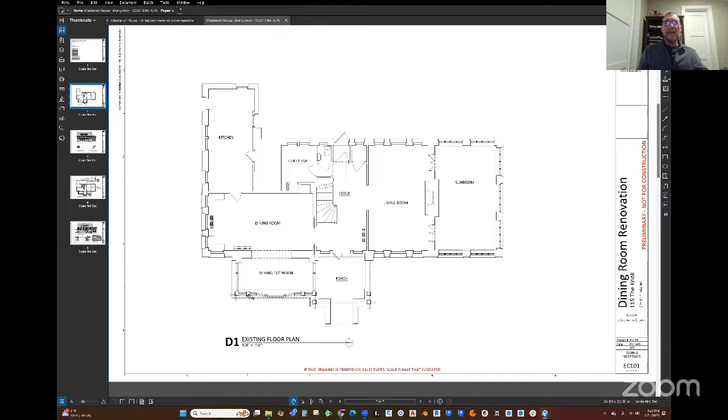I do, let me see if I can find one, because it really helps to... oh gosh, they're in the narrative. Yeah, I've got the ones that are relevant. Make it easier. Yeah, here we go, start with that first.

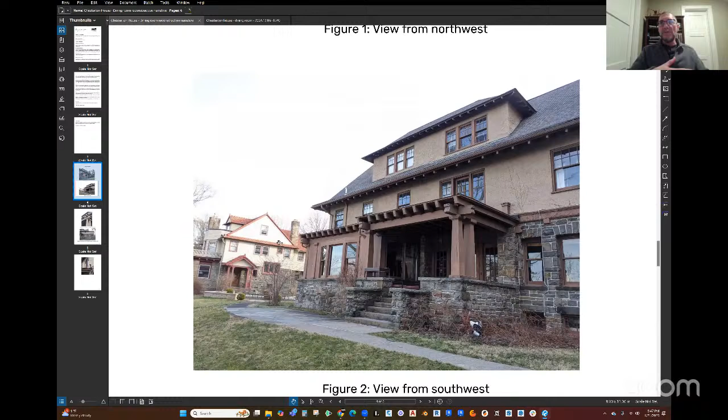Noah, maybe you can go back to a view of the previous page. So everything from the stone up would have to be removed, and then we wanted to reconstruct the porch in its entirety, but be more sensitive about the enclosure portion, where the dining room basically extends out onto that porch.

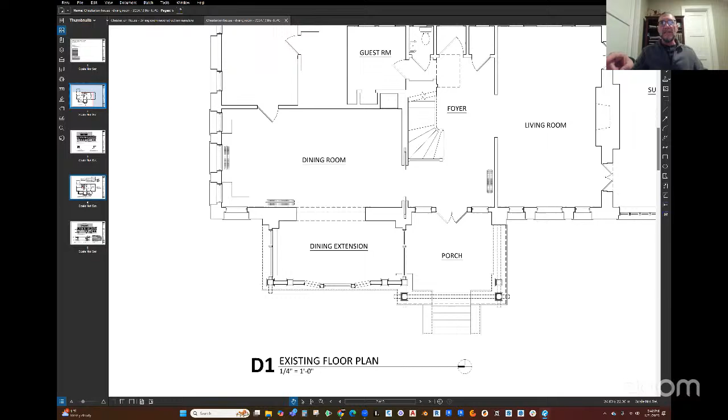So now, Noah, why don't you switch back to the plans, because I'd like to show the elevation there. So what we're proposing is... maybe you want to zoom in on that a little bit.

We're proposing to rebuild all of the wooden portions, the historic portions, but then behind it, put in some Marvin Modern Series glass, which has very minimal frames, just wide open glass, no screens or anything like that, so we can maximize the feeling of this being an actual open air porch.

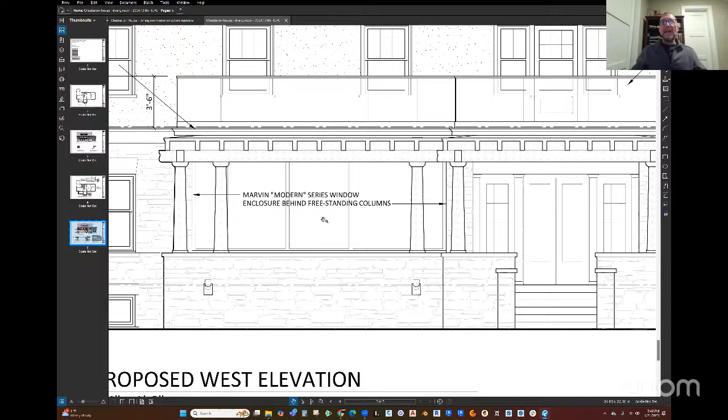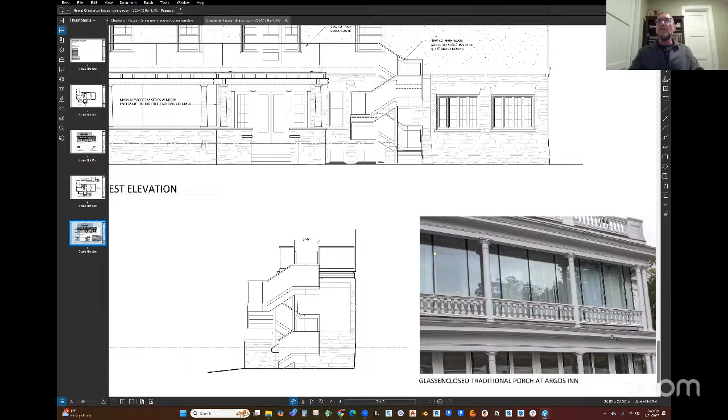And the client was also interested in developing a roof terrace up above. Originally this porch... you can see the kind of idea we're looking at here, which was done at the Argos, where the historic porch was there, and then to enclose it, the glass was set behind all of the historic elements, so it's very clear what's historic and what's not.

And what we're adding is extremely minimal, so as not to intrude on the original historic fabric the way that the insensitive enclosure did in the past.

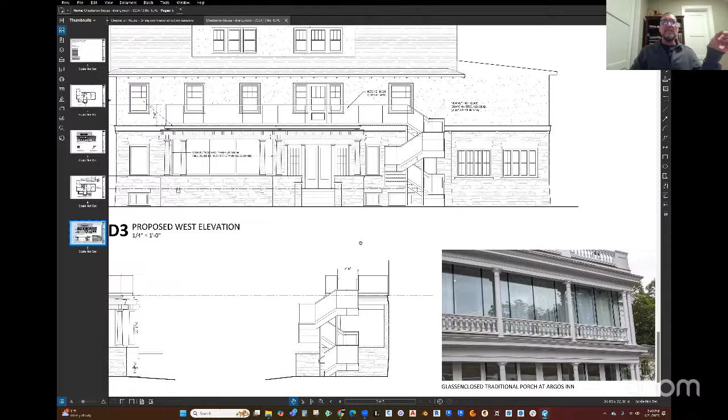Now, the client was very interested in developing a roof terrace on top of this, and there is actually a door there from the second floor stair hall. So originally, there was access out onto this porch. Unfortunately, the original railing was about 22 inches high, which does not meet code. We have to be 42 inches high for this building type.

So that meant that in order to do this, we would have to either build something 42 inches high in keeping with the original design, or replicate the lower railing and do something kind of clumsy on top of it, usually involving pipe railings or something set on top of the original wooden detailing.

We tried that and it just looked terrible, clunky. So then we got the idea to just continue using the glass up above, because we really have no obligation to reconstruct all of that original railing. So the thought was, make it all disappear, let the porch be the porch, but still allow a code compliant railing.

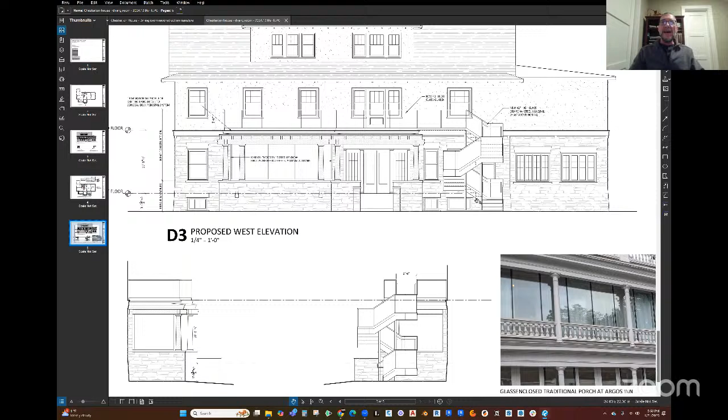That railing is all glass. The client also asked for a stairway to get down into the yard. This was a rather difficult piece to consider, because it's a large kind of sculptural element. What we're proposing is a steel structure, probably painted black or brown, with all glass railings, so that it appears more like a sculpture that is very separate from the design of the house, so you can clearly see what's modern and what's original.

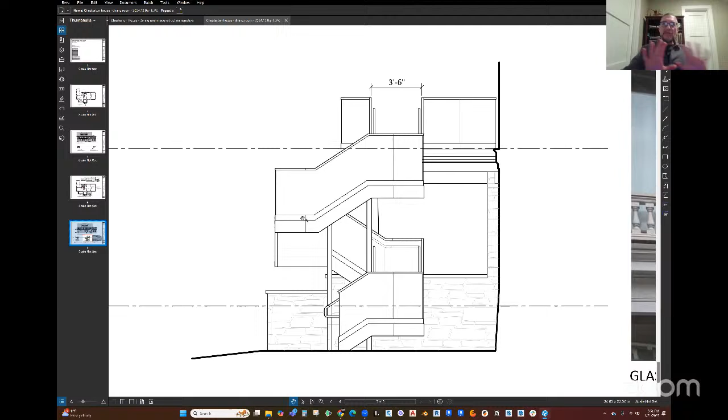So that's kind of the design in a nutshell. I'll let Noah talk about the other considerations that have come up today.

I just want to point out, the only evidence of that existing or pre-existing railing is this little pilaster that's against the house. Rob said that's about 22 inches tall, so it's not even close to being code compliant. One thought would be to leave that piece because it's there, but tie the glass railing into that point, and not even attempt to recreate that former balustrade, since we also don't know what it looked like.

I was thinking of taking cues from the balustrade inside the house, which is really wonderful and would look great out here. But unless somebody can find a photo of this before that balustrade was removed, we just don't know what it looks like. So we'd be guessing either way.

Is there only one half newel, or two of them? I believe there's only one. I did not see one on the other side, at least from the ground. It's a hard vantage point to see because the grade drops off. And at the time we were doing the field survey, the floors upstairs had just been polyurethaned, so we couldn't actually go up there.

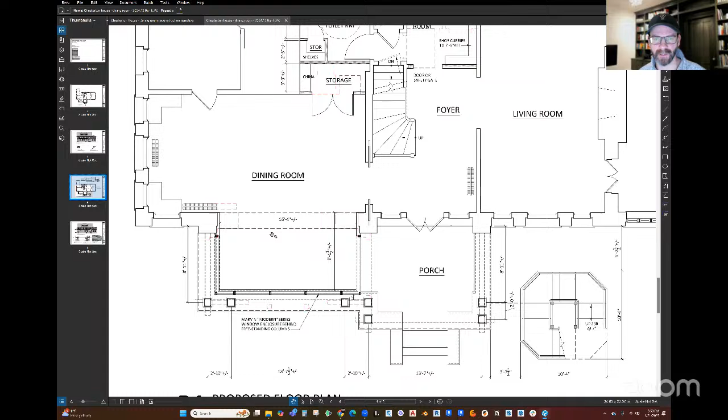We'd love to hear feedback on whether there's appetite to see something like that. But to be honest, those are likely things that wouldn't necessarily happen as part of this project, or at least maybe not initially. Maybe it gets phased in at a later date. There are also some interior improvements, including an accessible restroom, that we're not sure will make it into the scope. The real priority is to fix the porch, that's what we're primarily here for tonight.

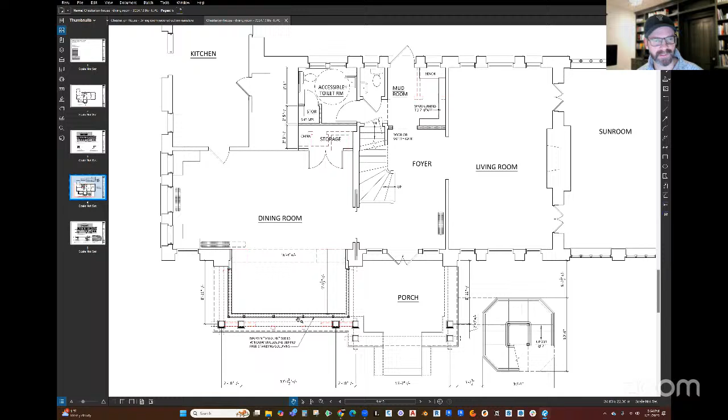With that, I think we'll leave it and open it up for any questions or comments.

What's the point of the exterior staircase, since there's not a public accessible route to that door upstairs? Does it go through a private room or something? No, there's access directly off of the foyer. The staircase goes up and there's a central hallway with direct access to that terrace. The thought would be just for convenience to create an outdoor connection.

So it's not a requirement, correct me if I'm wrong Rob, but it's not a code requirement because the terrace is essentially just an accessory use to the residential use, and it's not for very large residents. They're not going to have big parties up there, but they wanted to be able to sit out there and read and be able to go down into the yard without having to come back into the house, down the stairs, and out the back door. So it's very much an optional thing.

Are these new columns going to duplicate what's there? You're going to take everything down to the stone and rebuild. What will the new columns look like? Are they going to duplicate the historic? Yeah, the columns, the beams, the rafter tails, the extensions, every part of that would be recreated, would be documented and recreated exactly.

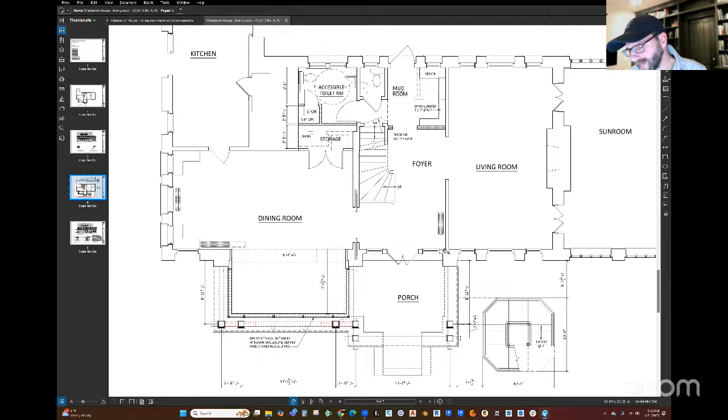It's important to note this is very similar to the Argos treatment, where the new glass wall we're introducing is set in about 7 inches from the existing to create that separation. We're really recreating the columns, but not touching the new to the old. It's intentionally separated.

Will the columns and other parts be solid timber or built up as box sections? I think they would be laminated in the same way. I'm not exactly sure what species and how that would be done, but it would make sense to recreate them similar to how they were. The only difference is we'd do a much better job with flashing caps on top to protect the wood. I don't think they failed early in their life, I think they failed over time, just with a lack of attention to detail.

I'm not convinced that the laminated sections are original. I think that might be some later repairs done by building up. I think the originals are solid timber. That was my sense, certainly possible. And I couldn't see any miter joints on the tapered columns, or at the corners or laps.

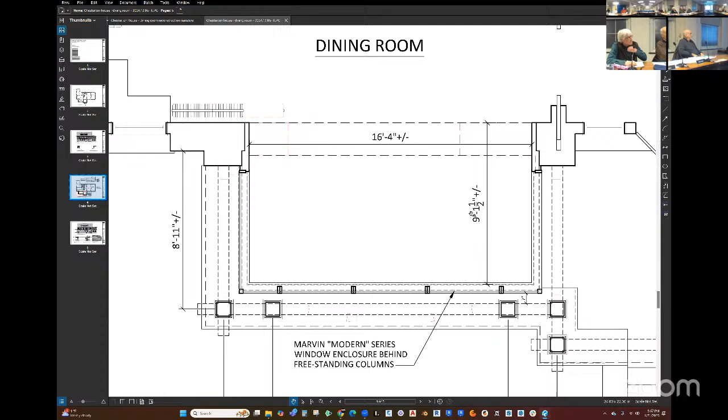Now, what's the story with the open porch again? Was it part of the original structure, or an addition built at some point? This particular porch, we believe, was part of the original structure. In fact, this was considered the main entrance because you got here by the trolley. I think these were all owned by the Treemans, so the trolley ran behind the house down the hill. So you really came in this entrance, because it's more symmetrical and clearly much nicer than the one on the other side.

We would certainly do some investigation on these beams to see if any are timber. It wasn't exactly evident to us, so it's quite possible it was a repair at some point. But I wouldn't be surprised if the method of laminating wood started around this era. I'm not convinced necessarily that it wasn't originally laminated. Perhaps Brian has input on that, or we could do some more research.

Yeah, I have actually seen laminated brackets before on older buildings, from anywhere around 1890 on. When they needed to be really super thick, they would laminate several layers, but those were usually protected under the eaves. I'm also looking at the scroll work on the ends here, and how much easier that would have been to do as a lamination even back then, to cut those individually instead of cutting the timber like that. Again, I don't know for sure, but it might require some more research.

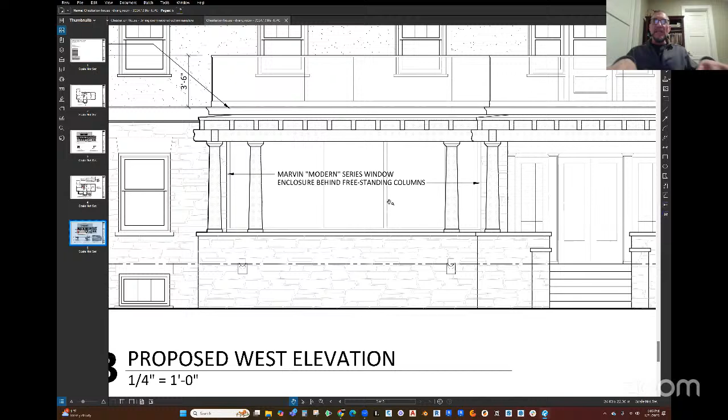That roof looks fairly sloped. Is it the intention to keep that slope, or to build a flat platform on top of it for the deck? The intention there was to do a membrane and keep the slope exactly the way it is, but then use a deck on pedestals to put on top of that, so in theory it could all just be removed one day. It's going to sit on top of the roof membrane and not be engaged on the roof. And then they would put either wood or stone pavers in between each of these pedestals and then mount the railing on top of that.

So is reconstructing the porch in kind, is it going to have the structural integrity to support that kind of weight? Yes, it will. The timbers are more than sufficient, and so are the columns. It would be fine. In fact, the roof weight of snow and the roof weight of people during the summer is pretty much the same, it's 55 pounds a square foot. That's what the code requirement is, and I think that structure will well exceed that.

And it was designed as a roof deck at one point.

So the reason I asked earlier about whether there were two applied newel posts upstairs, centered on that door window combination, my question would be, maybe the upper deck was only over the part that has the door below and not over the dining section that's shallower. Yeah, that's certainly possible. It could have been.

Did you consider just having that be the upper railing and not putting a railing all the way across the dining room section? It's just for a few people to read. Yeah, 14 maybe, and to be honest, with the kind of reduction in scope here, if we were to eliminate the stair, eliminate the part over the dining, and just did something more appropriate to what once was there, that might be a good reduction in scope.

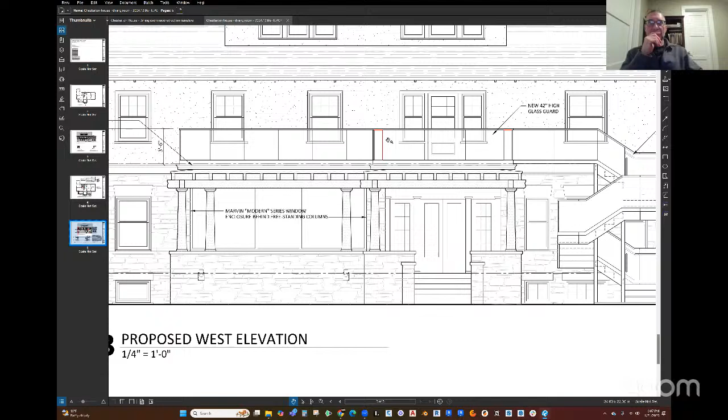I was going to throw out there that really, because this operates as such a principal facade, the staircase is a real hard sell for me. I think it's not a criticism of the design per se, in the sense that it does distinguish itself from the original, but I was just doing a rough calculation. To me it looks like it's got to be at least 10 feet wide.

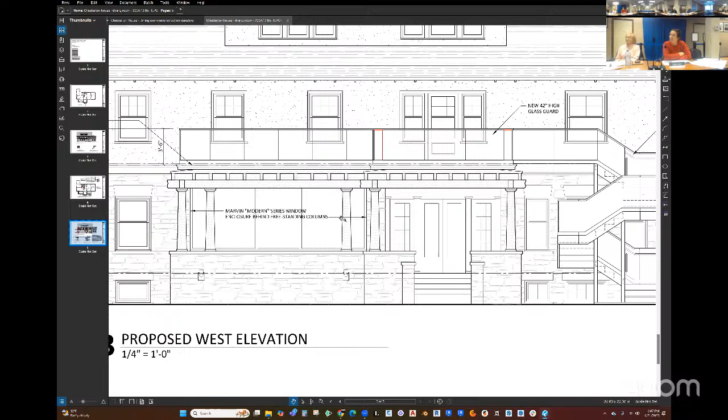10'4", okay, I was pretty close. And that's a primary facade smack next to the main, what functions visually as a main entrance.

I could possibly see getting on board for the terrace itself. It was designed in a way to really recede if it wasn't in use, kind of thing. But the staircase itself, it just functionally does not work. I don't think it works on the facade. Yeah, I feel the same way.

I also feel the same way. And I don't know who of us went over and actually looked at the site, it really was not a nice day to do that, but just looking over the structure itself, it's really beat. That wood is as rotten as anything I've ever seen, and parts of it are just filled in with Bondo and painted over. I mean, it's bad, so I could definitely support replacing it in kind.

And I'm with you, Caitlin. I could support the terrace, but I really don't like the stairs. Yeah, I feel the same way. That just glares out. If you go to the site and look at the facade, it's a beautiful building, and then to try to visualize that stair going up there, it just kind of destroys the general balance of the building.

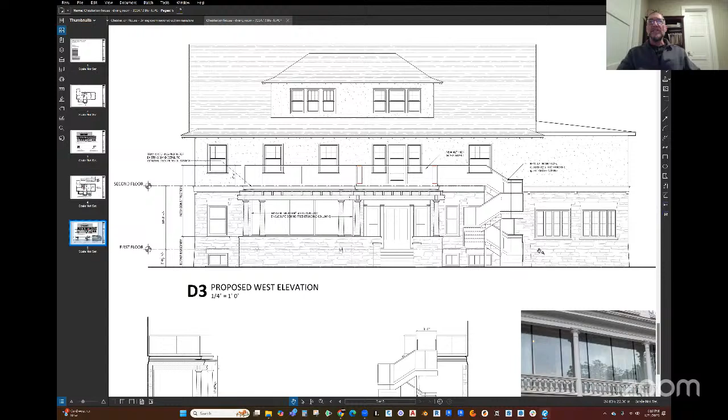That proposed glass railing is really just glass. Is there a rail to cap it off? There is a rail cap to hold the glass sections together, and there's also a base channel about 4 inches high that gets screwed onto the deck. So that gives you just that profile, right there. It's purely horizontal four-inch lines. There's not a lot of verticals. The gaps between are just glass butted, a small gap between each piece of glass.

But what we're talking about, I tend to agree. I think if we're going to reduce the scope, this would be the logical thing to do. And, sorry, I drew these too tall, those existing newels or pilasters are only 22 inches tall.

It may be worth either repairing or keeping them in some way as a remnant, and then tying the glass, wrapping them in the glass. Or butting the glass up to them, perhaps. The glass could also just hit the building outboard of it. In fact, the glass doesn't even have to hit the building. There would probably be a 2 or 3 inch gap there, just to allow the integrity of the stucco to run through.

How does the water make its way out of this assembly? The pavers that are on top of the pedestals have gaps between them. So the deck is perfectly level, but the roof surface underneath is sloped. So the water goes through the deck and just runs off the roof the way it does now. So the glass is not acting as a dam, it's actually free draining through the deck itself.

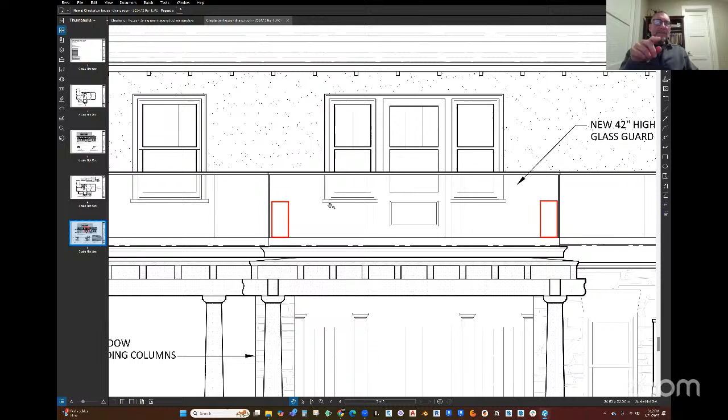Is there an existing built-in gutter? I didn't see any gutters. Check out the pictures, there's downspouts on there, but I'm not sure what kind of gutter exactly they have. Actually, there are no gutters, but there should be downspouts. There might be some sort of internal drain or something, or roof drains up at the edge. We'll have to get up on the roof to verify some of that.

Well, you can see it here. It's almost like the water is pitching to the edge of the roof and is being intercepted before it drips off into this downspout. That happens again here. So it's some sort of concealed gutter. It's something I have never seen before.

Especially if the commission were inclined to accept the staircase, I could appreciate wanting to tie the terrace into the ultra-modern aesthetic of that staircase. But seeing as how there doesn't sound like there's a lot of support for that ultra-modern staircase, it seems to me that the ultra-modern element of the terrace itself doesn't quite fit with the property. I wonder if it could be detailed in a wood that more integrates with the existing architecture, because I think it'll read strangely to make that ultra-modern component when it doesn't have anything else connected to it.